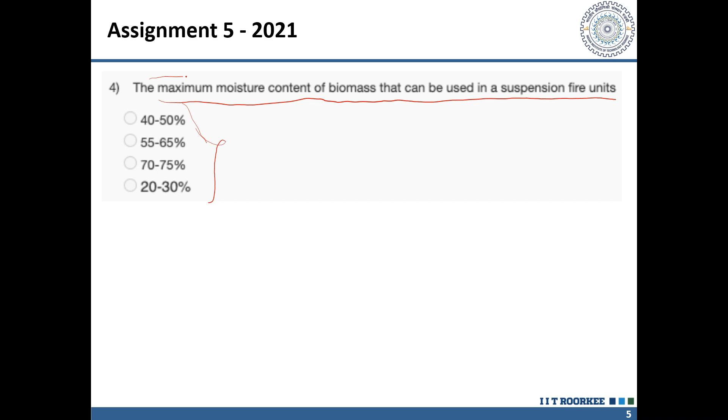So the question is, what is the maximum moisture content of biomass that can be used in suspension fire units? When we fire the biomass in a suspension fire unit, there is a particular amount of moisture required; there is a limit beyond which we cannot go. So what do you think might be the maximum moisture content that we can use in biomass? Any guesses? Anyone want to make a guess? No one?

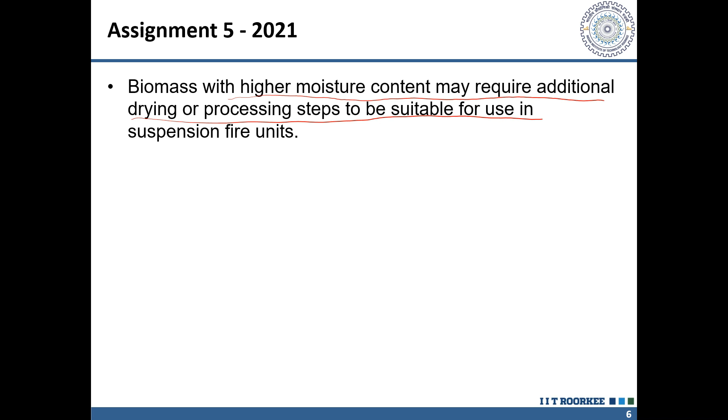Okay, the correct answer is 55 to 65%. The maximum moisture content we can use in biomass is 55 to 65%, but we generally use up to 50% moisture only, which results in a very optimum manner, and the maximum we can go is 55 to 65. Biomass with higher moisture content may require additional drying or processing to be suitable for suspension units. For example, if biomass has moisture content higher than 65%, like 70 to 80%, we will need some drying so that the moisture content decreases below 65, or between 55 to 65, or more preferably near 50%, so that further processing can be optimized.

The problem with high moisture is that the combustion process becomes inefficient, leading to incomplete combustion. If moisture content in the biomass is high, combustion is not very good, leading to lower heat output and increased emissions. Additionally, high moisture content can lead to slagging and fouling issues in the combustion chamber, which is made of metal or alloys that can suffer fouling due to high steam or water content, since water can also lead to corrosion. This can reduce the age of the combustion chamber, reduce efficiency over further cycles, and increase maintenance cost.

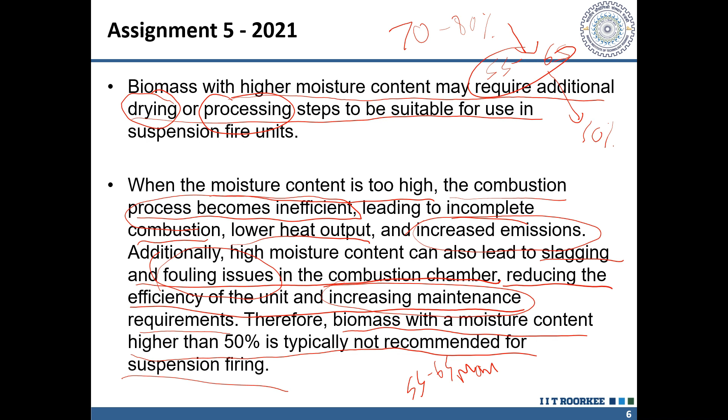So if moisture content is high, it leads to incomplete combustion, lower heat output, increased emissions, fouling of the combustion chamber, reduced efficiency, and increased maintenance cost. Therefore, biomass with moisture content higher than 50% is not typically recommended for suspension firing, but we can go up to 55 to 65% at max, though 50% is typically recommended for combustion units.

Now let's move to the next question: furfural resinification is defined as. You might remember furfurals as compounds formed during pre-treatment, specifically during the hydrolysis of hemicellulose. In week 4 we discussed that when we hydrolyze hemicellulose, we get soluble sugars, but we sometimes also get unwanted compounds such as furfurals. So the question is about furfurals.

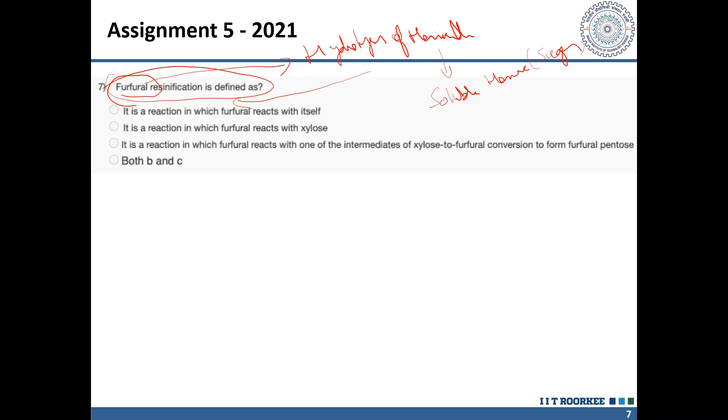Furfural resinification is defined as: it is a reaction in which furfural reacts with itself; it is a reaction in which furfural reacts with xylose; or it is a reaction in which furfural reacts with one of the intermediates of xylose to furfural. So what do you think might be furfural resinification? Any guess?

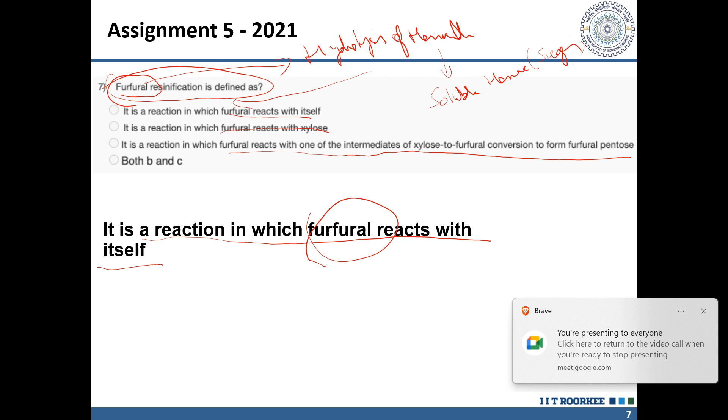Okay, so it is a reaction in which furfural reacts with itself. Furfurals are some kind of unwanted compounds formed during the hydrolysis of hemicellulose, and these furfurals react with itself to form something which is a type of resin. I will explain this resin and furfurals in the next slide.

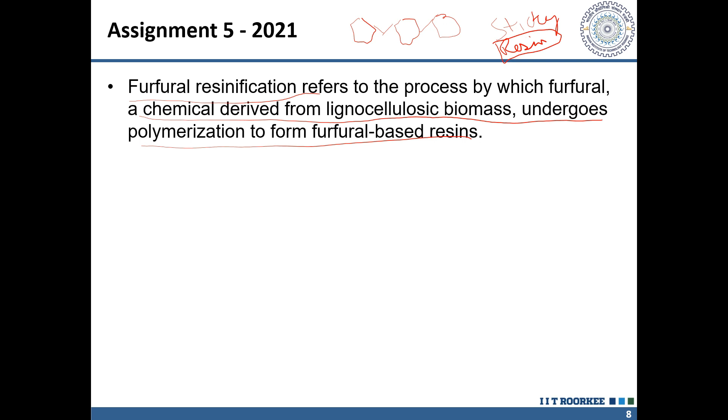Resinification process is the process by which furfural, a chemical derived from lignocellulosic biomass, undergoes polymerization to form furfural-based resin. It is a type of cyclic compound, and it reacts with itself, and it forms a very dense and sticky substance. This sticky substance is known as resin. You might have heard this term used for adhesive in other applications. Furfurals react with itself by heat, temperature and time, and it forms resin. This formation of resin is known as resinification, and when furfurals form resin, it is known as furfural resinification.

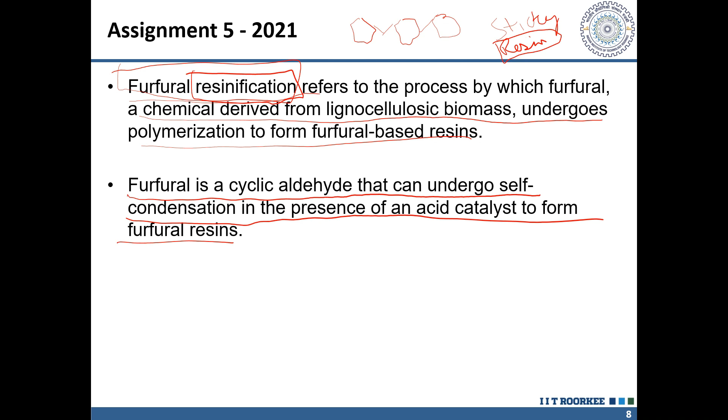Now we understand that furfural is a cyclic aldehyde that can undergo self condensation in the presence of an acid catalyst to form furfural resins. These resins have a wide variety of applications, including use as adhesive, coating, and thermosetting materials. So whenever we get furfurals during the hydrolysis of hemicellulose, we can extract the furfurals and do the polymerization to form the resin, and use it for a wide variety of applications such as adhesives, coatings, and thermosetting materials.

The properties of the furfural resin can be controlled by adjusting reaction conditions such as amount of catalyst, temperature, and time. The higher the temperature and the higher the time we give it, the harder the resin will get. So this particular furfural reacts with itself and forms a type of resin - you see it has now connected by itself, which is why it is also known as polymerization of furfurals to form a resin, which is particularly sticky in nature and can be used in adhesives and other coating applications.

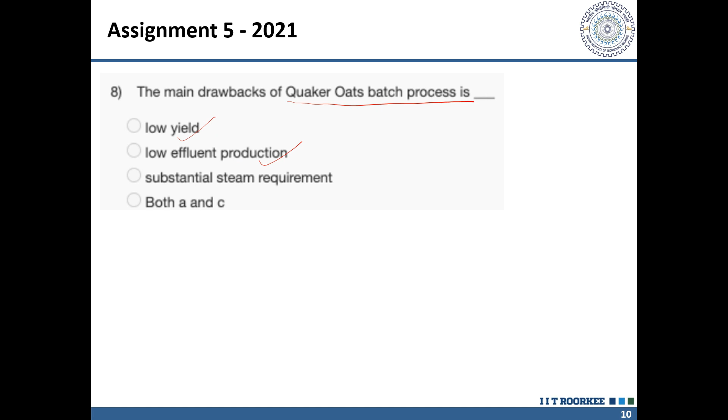So first we will go to the main question. The question was the drawbacks of Quaker Oat process: is it low yield, low effluent production, or substantial steam requirement? The answer is very low yield and substantial steam requirement. Low effluent production is not a disadvantage - it is an advantage, that's why it's not the right answer. The right answer is low yield and substantial steam requirement.

But what is this process? Quaker process is a pre-treatment to convert biomass into some valuable products. In this, biomass is treated with an acid such as aqueous sulfuric acid or phosphoric acid, along with steam, at nearly 153 degrees Celsius. This is also known as the hydrolysis step, and this hydrolysis step converts pentosans in biomass into pentoses.

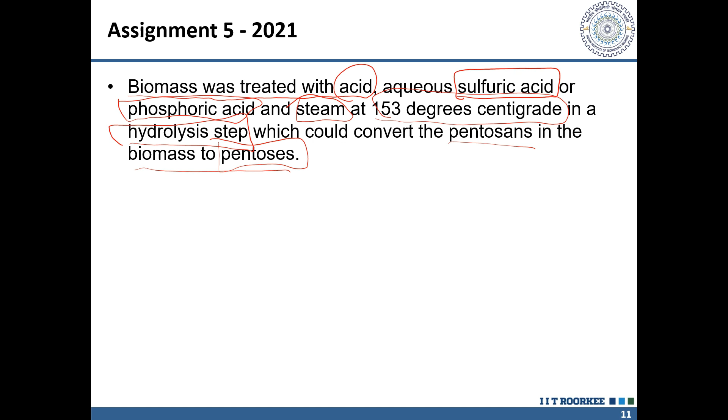The whole process of any treatment, such as acid hydrolysis, alkali pretreatment, organosolv pulping, enzymatic hydrolysis, or this Quaker process, has to do only one thing: convert biomass, which is made up of cellulose or hemicellulose, into its monomers or dimers. So the main thing is to convert polymer into monomers - just that, so that we can use this for fermentation and then produce biofuels. Quaker Oats process is also a similar process, and in this we use acid in the presence of steam, so that we can get pentoses from the biomass.

So these pentoses can be converted into furfural, and in a subsequent stage furfural can be recovered by steam stripping from solution. But the main problem with this process is it has a very low yield of less than 50%, and it also requires very much steam for the reaction. Producing steam is a very costly process in industry, and it also has a very high effluent production, because we use acids in it.

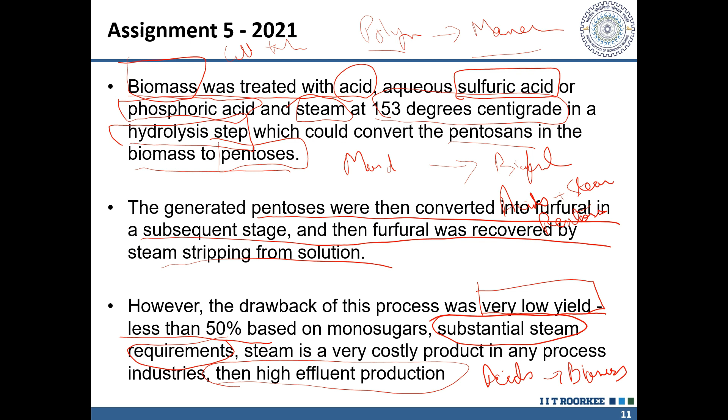So its major disadvantage is the substantial requirement of steam and very low yield, because the acids present can sometimes degrade the biomass also. When it degrades the biomass, we get very low yield.

Now let's move on to assignment 5 of 2022. Most of assignment 5 of 2021 was repeated in 2023, so those questions I will be discussing at the last.

The process by which wood absorbs moisture from humid air is known as? Wood has hydroxyl bonds. It is hygroscopic in nature, and it attracts moisture from the environment very rapidly. But what is the process in which wood attracts water? Is it adsorption, absorption, humidification, or both? Any guess what phenomenon wood uses to absorb water?

Okay, so the answer is both A and B. Wood is very hygroscopic in nature, and that's why moisture from the air can come onto the surface of the wood. After the water comes on the surface, it goes inside and gets absorbed. The water coming in physical contact with wood is adsorption, and when it goes inside the wood, it is absorption. So in both ways, wood takes up water from humid air.

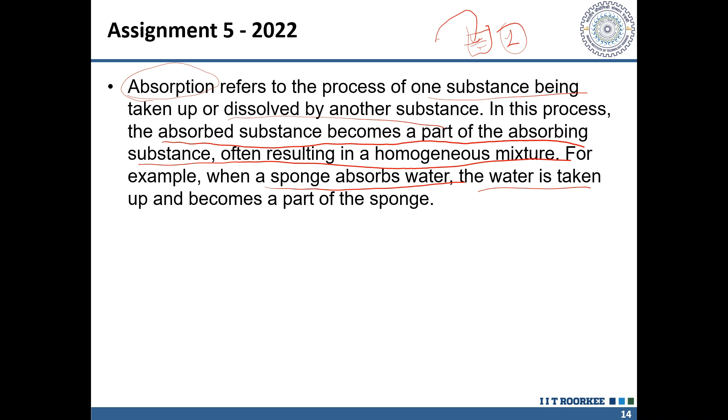First, we will see the word absorption. It refers to the process of one substance being taken up or dissolved by another substance. If a substance takes another inside it and forms a one-component type thing, it is absorption. The absorbed substance becomes part of the absorbing substance, often resulting in a homogeneous mixture. For example, a sponge absorbs water; the water is taken up and becomes part of the sponge.

On the other hand, adsorption is a process of a substance sticking to the surface. Molecules stick to the surface of other substances without necessarily being taken into the substance itself. For example, charcoal is used to filter impurities from water. The impurities are adsorbed onto the surface of charcoal; they will not go inside but onto the surface. So this is adsorption.

If we look at this example, if we have a surface here, in adsorption the water molecules will come to the surface. They will not go inside. But in absorption, the water molecules will penetrate the surface and go inside the structure. That is absorption.

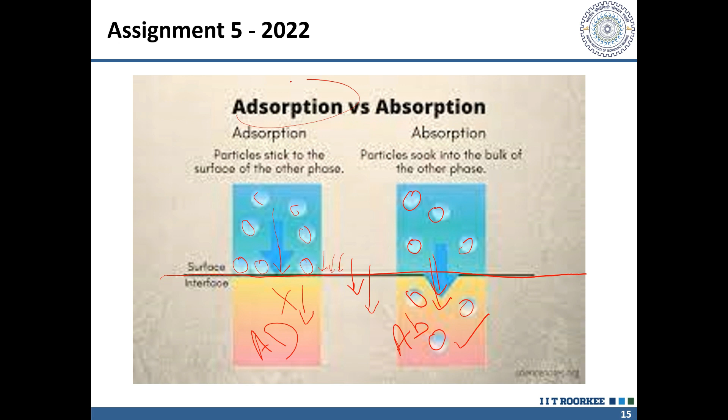So when humid air is present in the environment, the wood will first adsorb the molecules from the air, and water molecules that come to the surface will go inside the wood. So in this case, wood uses both adsorption and absorption.

The second question: the relation between flame temperature and moisture content of woody biomass is directly proportional, inversely proportional, or independent of each other. If woody biomass has high moisture in it, what will be the requirement of flame temperature? If high moisture requires higher flame temperature, the answer is directly proportional. If higher moisture means lower flame, it is inversely proportional. Or there is no relation between them.

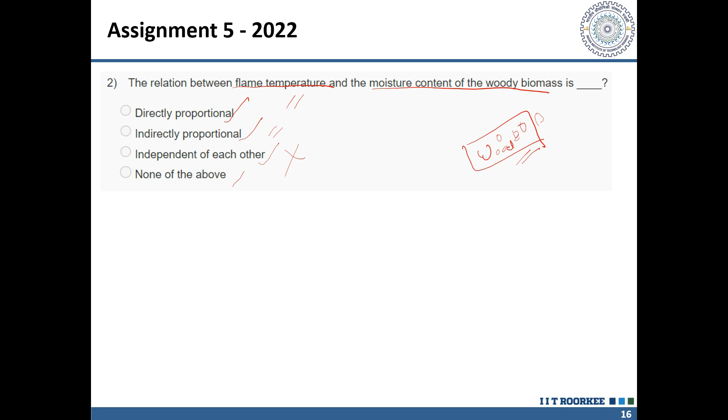The answer is that it is directly proportional. How? Flame temperature is directly related to the amount of heat necessary to evaporate the moisture content in the wood. The higher the moisture, the higher the heat required to evaporate it, and therefore the higher the flame temperature. Similarly, if the moisture is lower, less energy is needed to remove the water and boiler efficiency is higher.

So to increase boiler efficiency, we need wood with low moisture content. We have also seen in the first question of this slide that a moisture content of 50 to 55 to 65% is preferred, and not above that, because it will result in lower boiler efficiency. As the moisture content of woody biomass increases, the energy required to vaporize the moisture also increases. That's why the answer is directly proportional.

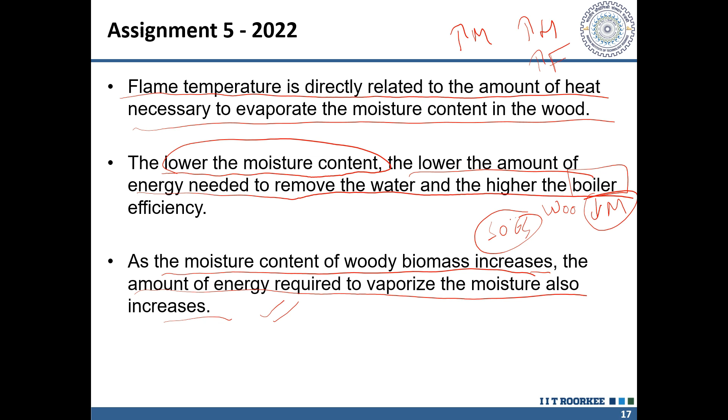So now let's move on to the next question. In the commercial steam explosion of biomass, the typical pressure of the steam is... So there's a process in which biomass is exploded only by steam, without any chemicals. That process is known as steam explosion. We do not use any kind of acids, alkali or organosolv. We only use steam. So what kind of pressure does it use? 7 to 10 MPa, less than 7, 10 to 15, or more than 15 MPa.

Anyone wants to make any guess about this? Anyone? You might know the answer also, and don't think about whether the answer might be wrong or right. You can make a guess also.

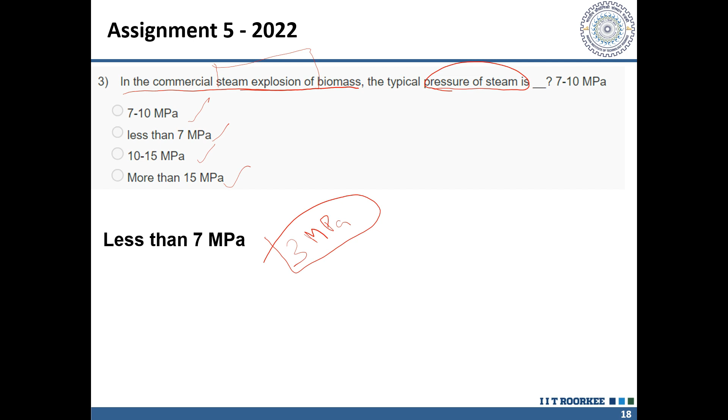No one? Okay. So the answer for this is less than 7 MPa. Particularly, we require around 3 megapascal of pressure in case of steam explosion. So the answer is less than 7 MPa. So we use 1 to 3.5 megapascal of pressure for the steam explosion, and this amount of pressure is sufficient to cause the biomass to undergo rapid and intense pressure release.

If the steam goes inside the biomass with very high pressure, it will burst this biomass and disrupt the cell structure. So the cell will be disrupted, and the fibers inside it will also get disrupted due to this high pressure. So 3.5 megapascal pressure is sufficient to disrupt the whole structure of biomass, and this will lead to fibrillation of biomass. So every individual fiber will get opened. It will form a very open structure.

This open structure will lead to an increase in the accessibility of cellulose to enzymes or chemicals for further processing. So before we do any kind of acid hydrolysis or organosolv process, we can also do steam explosion, because steam explosion can reduce the amount of chemicals required in the next step, since we have already opened up the fibers, and thus less acid is required to go inside them. So steam explosion is sometimes done prior to any kind of acid treatment or alkali treatment.

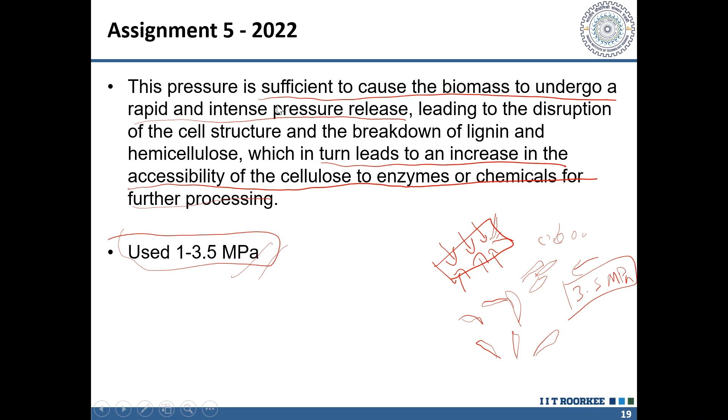A hydropulper is a machine into which we can feed recycled materials, such as recycled cardboard and newspapers. We can put this waste biomass into the hydropulper, and there is a mechanical mechanism which rotates in it, and these blades cut the fibers and fibrillate the newspaper into fibers. Plus there is water in it. So the hydropulper works on two mechanisms: first, the cutting action by the blades, and second, the force created by the water.

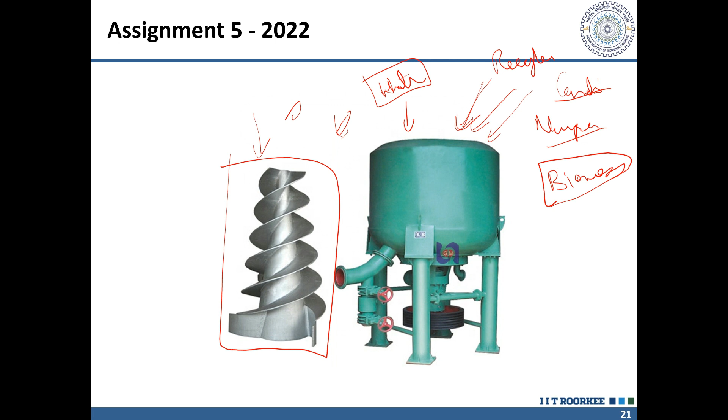So the water and mechanical forces combine very synergistically to make fibers out of the cardboard, newspaper or any other waste biomass. In this way, we can use waste biomass to create fibers, and then we can treat those fibers and produce some kind of products by fermenting them.

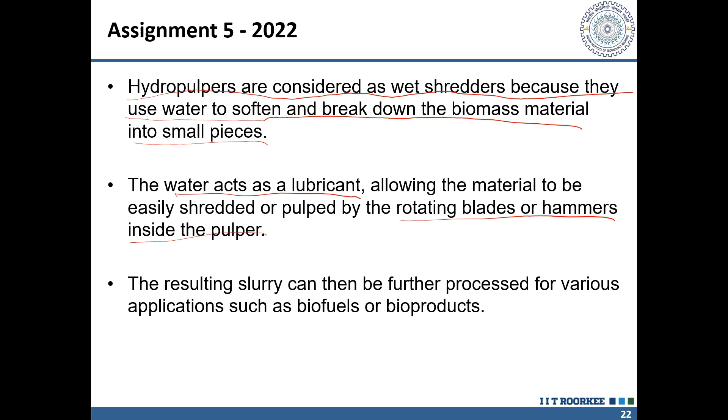So hydropulpers are considered wet shredders because they use water to soften and break the biomass material into small pieces. Water acts as a lubricant, allowing the material to be shredded or pulped by the rotating blades or hammers inside the pulper. The resulting slurry can be further processed for various applications such as biofuels or bioproducts. So I hope that you have understood what a hydropulper is, its mechanism, and why water is used in it. That's why it's also known as a wet process.

So the next question is, which type of feedstock can be used for supercritical water gasification? Is it dry feedstock, wet feedstock, both A and B, or none of the above? So the answer for this is wet feedstock, and you can easily guess it because of the name, supercritical water gasification. So it has the word water in it.

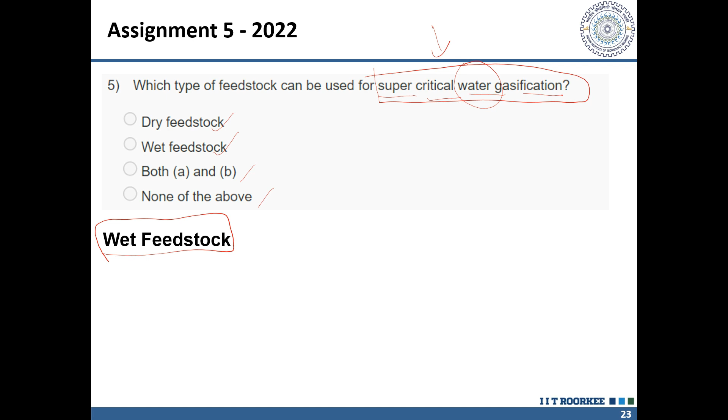So it only uses wet feedstock to continue the process. But what is the supercritical water gasification process? In this process we take biomasses, any type of biomass, either it is wood or vegetation or any type of husk or grasses. We can take any type of biomass and give it some conditions.

Those conditions are known as supercritical conditions, and that is temperature above 374 degrees Celsius. We have to give a temperature of 374 degrees Celsius and a pressure of 22.1 megapascal. So these are the supercritical temperature and pressure of water to generate a state in which water exists neither in liquid nor vaporized phase. So this is known as the supercritical water gasification process.

In this process, these lignocellulosic biomasses convert into some useful gases such as hydrogen, carbon monoxide, carbon dioxide, and methane. And this we can use as fuel for further uses. The main advantage of this process is that we can use any type of lignocellulosic biomass, any type of waste biomass, and just by giving high pressure and high temperature, we can convert it into useful gases.

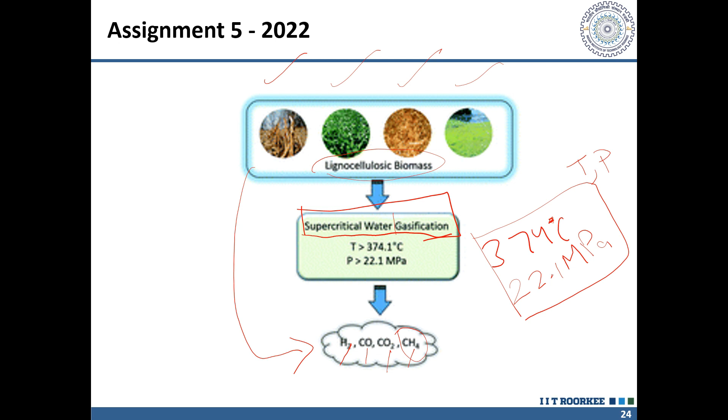So generally, this process can take both dry and wet feedstock. Supercritical water gasification can take both types of feedstock, but wet feedstocks are preferred as they are easy to handle and of higher energy density than dry feedstocks. So, supercritical water gasification is a process that uses water at very high temperature and pressure, also called supercritical condition, to convert biomass into gaseous fuels.

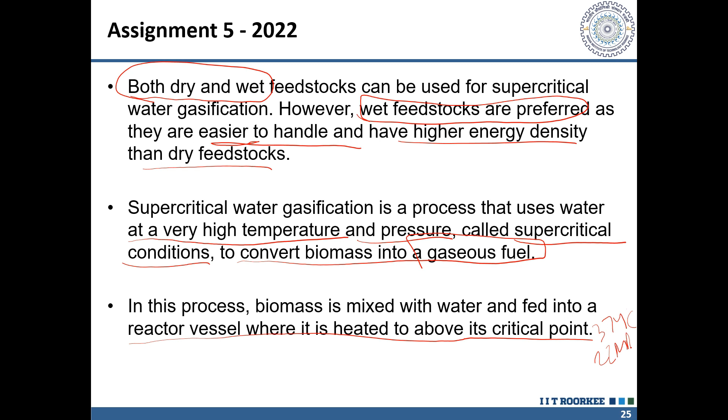In this process, biomass is mixed with water and fed into a reactor vessel where it is heated above its critical point, that is 374 degrees Celsius and 22 megapascal of pressure, more than 22 and more than 374 degrees Celsius. So if we give it a very high temperature and high pressure, we can convert any kind of lignocellulosic biomass into useful gases.

So what is this supercritical condition? Supercritical condition is a state in which water exists in a state that is neither liquid nor gas, but instead it has properties of both. So at this high pressure and temperature, it is neither in liquid state nor in gas state, but it will show the properties of both, and that's why it is called supercritical condition.

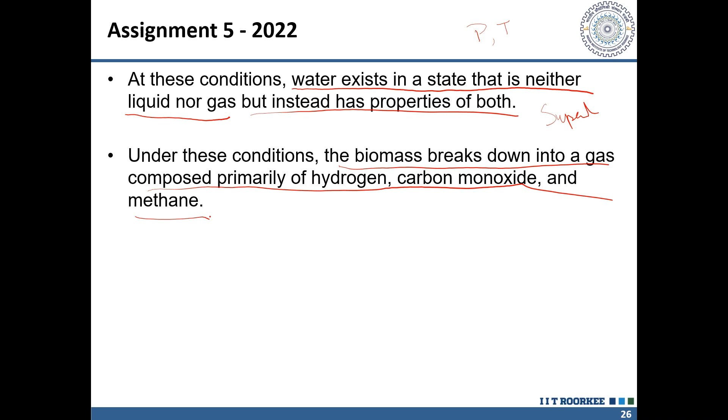Under these conditions, the biomass breaks down into gas composed primarily of hydrogen, carbon monoxide, and methane, and the resulting gas can be used as a fuel for power generation or as a feedstock for production of other chemicals. So in this way, we can utilize the waste biomasses to produce some products which have a very high economic value.

Supercritical water gasification has several advantages over other biomass to fuel processes, such as it can handle a wide range of feedstock. As we have already discussed, it can handle any type of feedstock such as woody biomass, non-woody biomass, any type of straw, grasses, anything. We can use a very wide range of feedstocks.

Also, it has a very high conversion rate and very low emissions. And all the gases which we get, hydrogen, carbon monoxide, and methane, can be used either for fuel, or we can use these gases to produce some other chemicals also. So it has very many advantages over other processes.

So now let's move on to the sixth question. What are the different products produced from ultra rapid pyrolysis? The options are bio oil, chemicals and gas, charcoal, and chemicals and gases. So first of all, what is pyrolysis? Pyrolysis is nothing but a process in which we heat some biomasses in absence of oxygen or in absence of air and at high pressure and high temperature. Then it is known as pyrolysis.

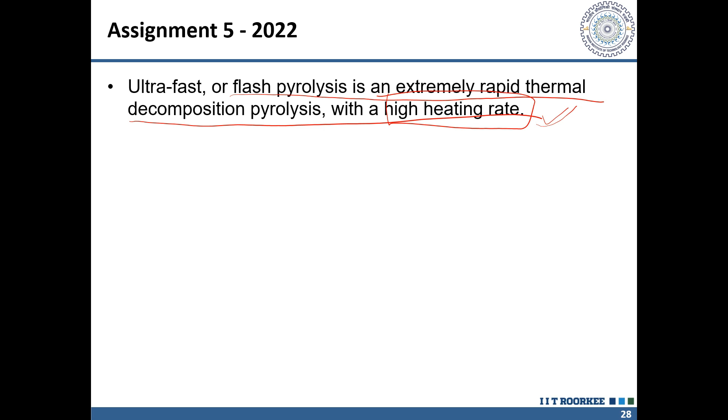So the main thing which we are getting by increasing the heating rate is increased content of bio oils. We get very high amount of bio oils and very less amount of char. So we have reduced the amount of char and increased the amount of bio oils just by increasing the heating rate. So that's why it is known as ultra fast pyrolysis. It is also a very fast process.

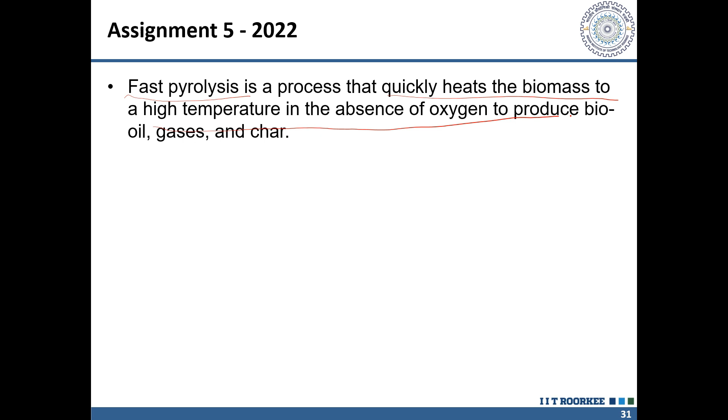So okay, what is fast pyrolysis? It is a process that quickly heats the biomass to high temperature in absence of oxygen to produce bio oil, gases, and char. The yield of bio oil depends on various factors such as type of biomass, temperature, and residence time of the pyrolysis process. And typically, the yield is between 60 to 75% of bio oil.

This is because fast pyrolysis is designed to maximize the yield of bio oil as a primary product. However, the yield can depend on various conditions such as the time and temperature, because there is a very broad range in temperature also. So that's why the yield has a very broad range, that is 60 to 75%.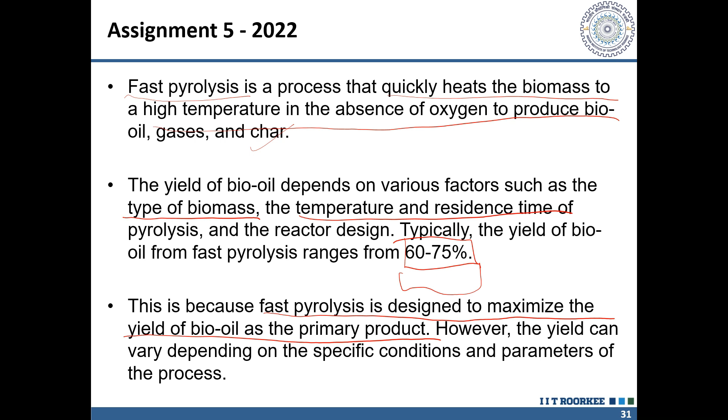Now let's move on to the eighth question. Which of the following pyrolysis reactors can process biomass having large particle size? So till now we have seen what pyrolysis is: a process in which we heat the biomass in the absence of oxygen. But what kind of reactor will we require if we have a larger particle size? So the answer to this is vacuum pyrolysis reactor.

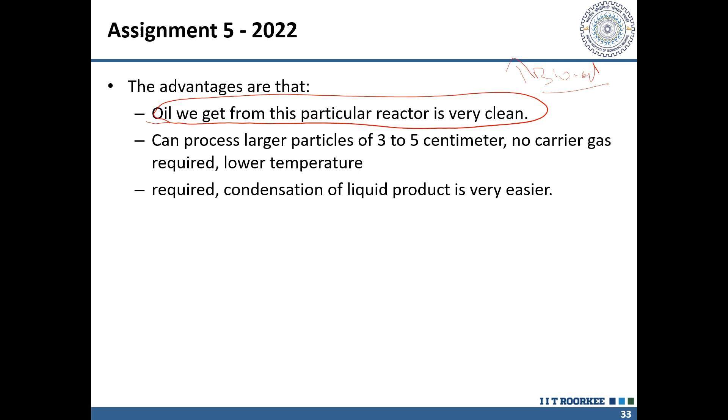So the advantage of vacuum pyrolysis reactor is that, first of all, if there is a vacuum, if we create a vacuum inside the pyrolysis chamber, then we will get a very clean bio oil without any contamination. So the quality of bio oil is superior in vacuum pyrolysis, and there is also one more advantage that we can use some larger particle size, such as 3 to 5 centimeter.

We can also go for 3 to 5 centimeter of particles in the pyrolysis process, and no carrier gas is required, and also lower temperature. We can also conduct the pyrolysis at lower temperature, just because by applying a vacuum in it, we can go for lower temperatures also.

But it has some disadvantages, such as it is a slow process. The residence time is also high. Residence time means the contact of heat with the biomass. So that time is also high. That's why it is a slow process.

In vacuum pyrolysis we are applying a vacuum, and we can also give particle size of 3 to 5 centimeter. So one more disadvantage is that we require a very large scale equipment for this. We cannot do it in a small equipment. We need a large scale equipment.

And as the equipment is very large, the heat and mass transfer rates are poor, because the temperature and mass transfer rate can be different at different positions due to the large size of the container. Therefore, it also has a disadvantage of poor heat and mass transfer rate. Also, it generates water when compared to other processes. So apart from the advantage of using 3 to 5 centimeter larger particles, it also has some disadvantages.

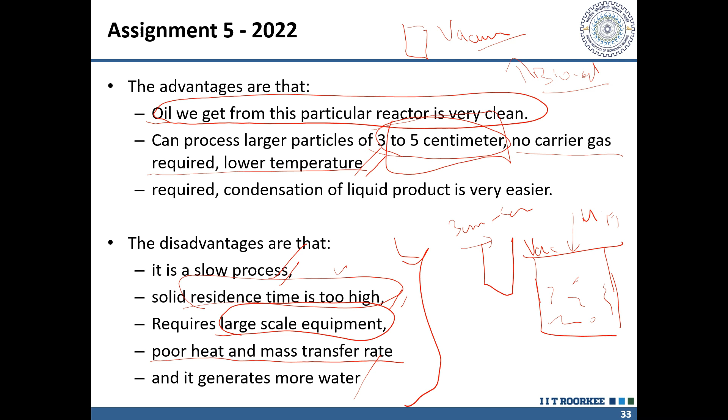So now let's move on to the ninth question. The homogeneity of pre-consumer food waste is blank compared to the post-consumer food waste. So first of all, what is pre-consumer food waste and post-consumer food waste? Pre-consumer food waste is nothing but a waste which we have not used. We as consumers have not used it, and it becomes waste before consuming.

And post-consumer mixed waste means we have consumed it, and somehow when we dump it into the yard, we mix it with very different things such as packaging also. So pre-consumer food waste will be of homogeneous type, and post-consumer will be heterogeneous, because we mix things after consuming it. So the question was, the homogeneity of pre-consumer food waste is. So homogeneity is higher for pre-consumer food waste.

So if we go for a small example, pre-consumer food waste typically comes from a single source, such as a restaurant or food processing facility, and it is often sorted and separated before disposal. So this is a type of food waste, pre-consumer food waste, and it has high homogeneity because it also goes through a sorting procedure.

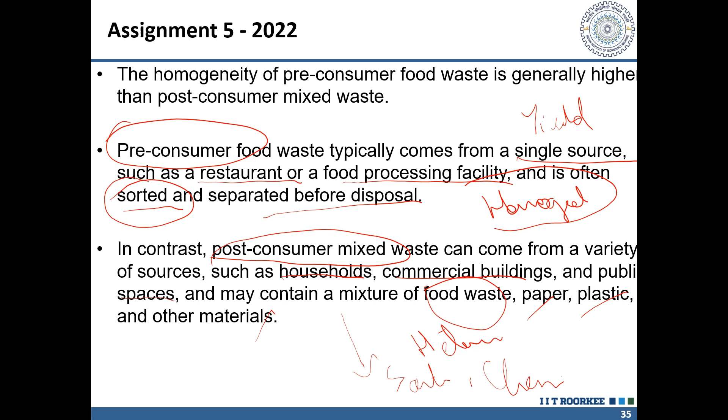Therefore, the homogeneity of pre-consumer food waste will be higher than post-consumer food waste, and that's why if we want to create some fuel or other useful products out of the food waste, we will prefer pre-consumer food waste because it is homogeneous and therefore the yield will be high for these products. But if we are using post-consumer food waste, we may need some kind of sorting or cleaning before going towards the chemical reactions or further processing.

The main product obtained from the fermentation process is. So by now we have seen that whatever we are doing, we are just breaking the polymers such as cellulose and hemicellulose into smaller sugars, which are monomers. So why are we breaking it? So that we can do fermentation of the sugars. So what will this fermentation lead to? We can obtain bioethanol and carbon dioxide.

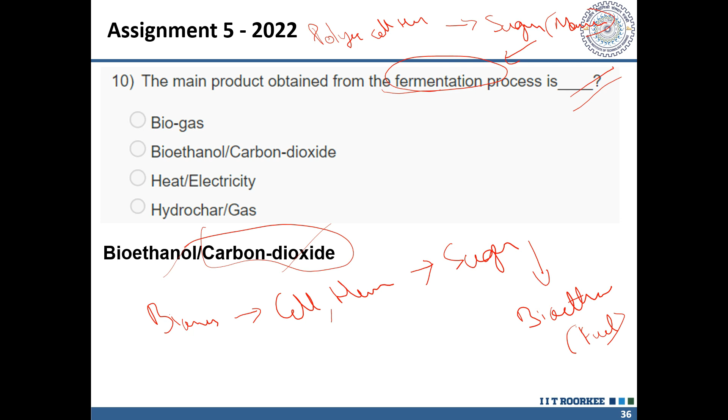So the main process for this is that we take any type of biomass and take the cellulose or hemicellulose of it and then convert it into sugars, on which we will do the fermentation and obtain bioethanol. And this bioethanol will act as a fuel. So the main product of fermentation is bioethanol, and the secondary product is carbon dioxide. It also produces many other products in very minor quantity.

So one of the most common products obtained from fermentation is bioethanol, which is produced by anaerobic fermentation of sugars present in the biomass. Other fermentation products may include biogases such as methane, carbon dioxide, and it may produce some organic acids, hydrogen gas, and various gases depending upon the feedstock and processing conditions.

But the major thing is why we are doing all this, why we are taking the biomass and treating it with acid, alkali, organosolv. We are just breaking those complex polymers into smaller sugars or monomers so that we can ferment those products and produce bioethanol. So the main objective of all the pre-processing or other treatments was to produce bioethanol out of the biomass.

You all might have done assignment 5 of 2023, and the deadline was 2 days ago. You may also have received the answers for those. Now I will discuss those questions, answers, and the reasoning behind them so that your concepts become very clear.

The first question of this year's assignment 5 was: the common type of dry shredder used for reducing the size of biomass is - hydropulper, horizontal shaft hammer mill, vertical shaft hammer mill, or both B and C?

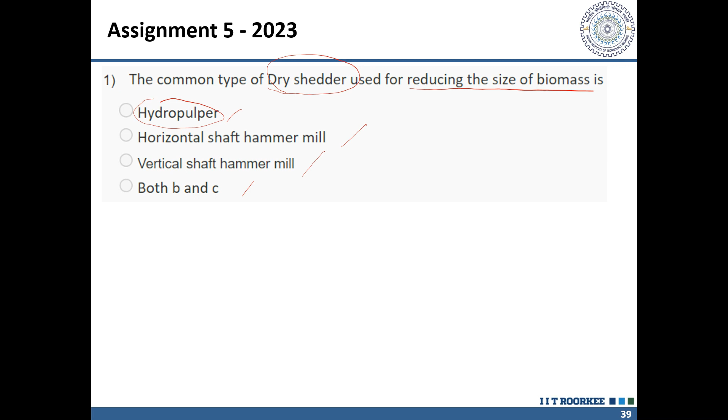From the previous questions we have seen that hydropulper is a wet process, and also we can guess from the name hydro that it is not a dry shredder. So the answer is both B and C: horizontal shaft hammer mill and vertical shaft hammer mill.

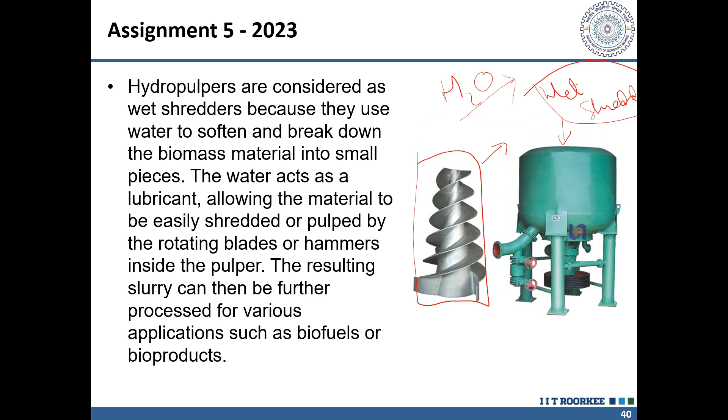You have all seen the mechanism of hydropulpers, that it has a cutting action by the blades, and it also uses the centrifugal forces of water inside it. With the help of water and mechanical forces, we can disintegrate the fibers in the hydropulper. So it is a wet shredder, we reduce the size by a wet process. Hydropulper is a wet shredder, it is not a dry shredder.

But hammer mills are known as dry shredders. These are of two types: one is vertical and second is horizontal.

Before going towards the vertical and horizontal types, what are hammer mills? They are mostly impact grinders with swinging or stationary steel parts forcing ingredients against a circular screen or solid serrated section designated as a striking plate. It is a type of grinder in which steel bars swing and then reduce the size of biomass with force.

In this, the material is held in a grinding chamber. We put the material in, and the hammer mills are used until the size has been reduced. This is a type of mechanical process - there is no water in it. It is a purely dry process.

But this high mechanical activity leads to an increase in temperature, and therefore heat is imparted to the material due to the work of grinding, related to the time it is held within the chamber. You might have seen ball milling also, where a ball hits the surface on both sides at very high frequency, and with time it generates heat. So heat is also generated in this process.

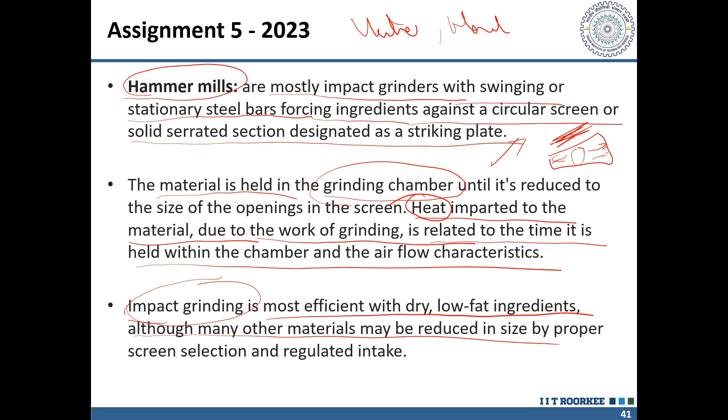So it is a type of impact grinding - we are impacting the biomass with a hammer. It is the most efficient with dry and low fat ingredients, although many other materials may be reduced in size by proper screen selection and regulated intake.

So what is this? There are two types of hammer mills: first is the horizontal type, and second is the vertical type.

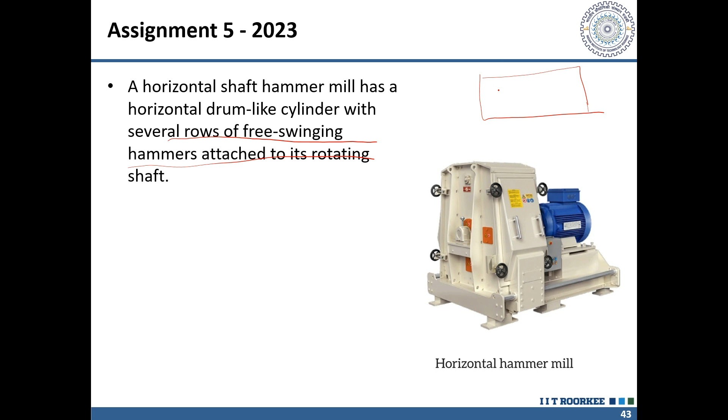In a horizontal shaft hammer mill, it has a horizontal drum-like cylinder with several rows of free swinging hammers, attached to a shaft. The shaft rotates, and the hammers then impact the biomass inside it.

Biomass material is fed to the mill from the top and is pulverized - in layman's terms, this just means reduction of size. The biomass is pulverized by the repeated impact of the hammers against the material. The ground material is then discharged from the bottom of the mill, and we get the ground or reduced-size particles from there.

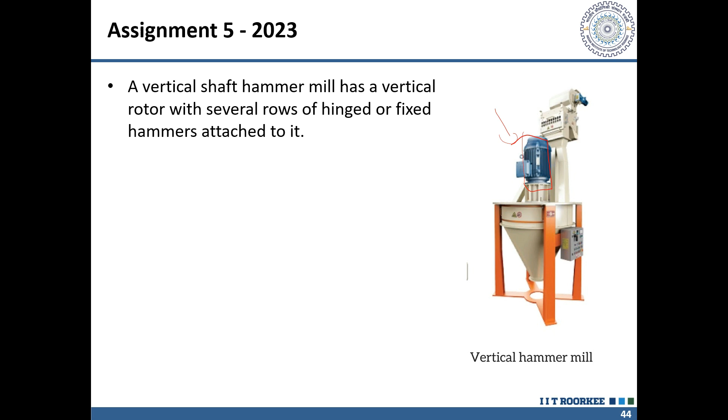In the case of a vertical hammer mill, it has a vertical rotor, with several rows of hinged or fixed hammers attached to it. Here too, the biomass is fed from the top into the mill, then pulverized by the impact of the hammers against the material, and the ground material is collected from the bottom.

So the mechanism of both is the same, the only difference being that one is a vertical process and the other is horizontal. But the main thing is that hammer mill is a type of impact grinding, not wet grinding - there is no involvement of water in it.

So the second question of this year was: the density and moisture content of baled straw is in the range of. So first, what is baled straw? What is bale? Bale is nothing but a compressed form of biomass.

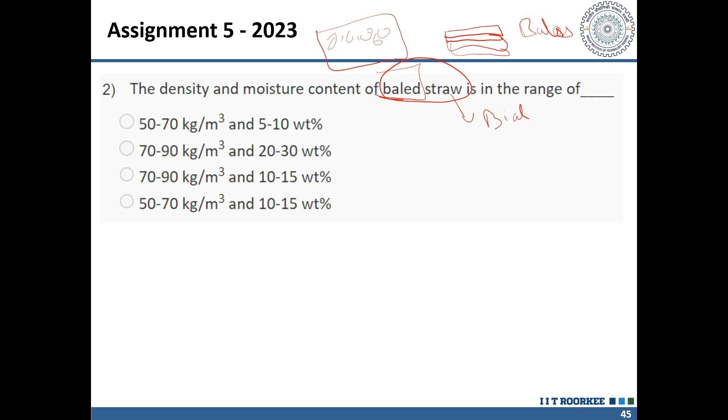We have biomass or cellulose, and whenever we see cellulose and biomass, they are very fluffy and take up much higher space. So we compress it into blocks of biomass, and this highly compressed form is known as bale, B-A-L-E, or bales. So if we are using straw as the biomass, then this is known as baled straw. So the density and moisture content of baled straw is in the range of...

The correct answer for this is 70 to 90 kg per meter cube, and 10 to 15 weight percent.

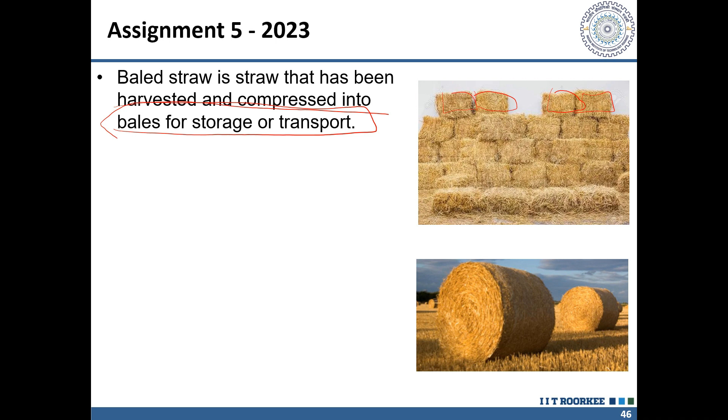So this is what baled straw looks like. It is a straw material that we have compressed so that it takes less space. Baled straw is a straw that has been harvested and compressed into bales for storage and transport, so that transportation and storage are optimum and easier.

And what is straw? Straw, in agriculture, is an agriculture byproduct consisting of dry stalks of cereal plants such as wheat, rice, and barley.

You might have heard that there is pollution near Delhi NCR due to stubble burning of straws. Those straws are also biomasses, and those biomasses can also be used to convert into fuels and other bioproducts. So those are the straws we see in news about stubble burning in Delhi NCR causing pollution there.

So now you have understood what straw is. Straw is an agriculture byproduct that can be made up of wheat, rice, barley, or oats, hence the names wheat straw, rice straw, barley straw, and oat straw. Baled straw is commonly used for animal feed, bedding, and mulch, and it can also be used as a feedstock for bioenergy production.

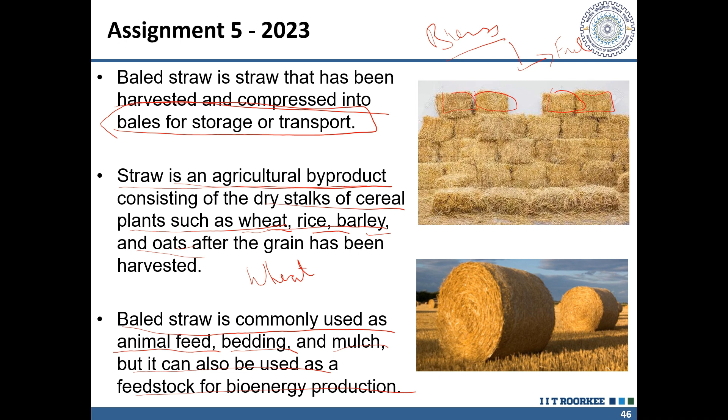So now let's move on to the third question: the increase in moisture content of biomass - how does the moisture content in biomass affect the boiler efficiency?

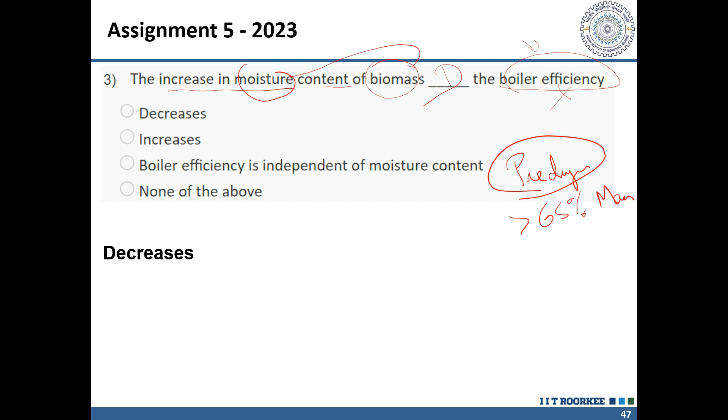The increase in moisture content of biomass decreases the boiler efficiency, because the energy required to evaporate the excess moisture present in the fuel reduces the available energy of combustion, leading to a decrease in boiler efficiency. Also, the higher the moisture content, the greater the fouling of the boiler, hence the boiler efficiency gets reduced.

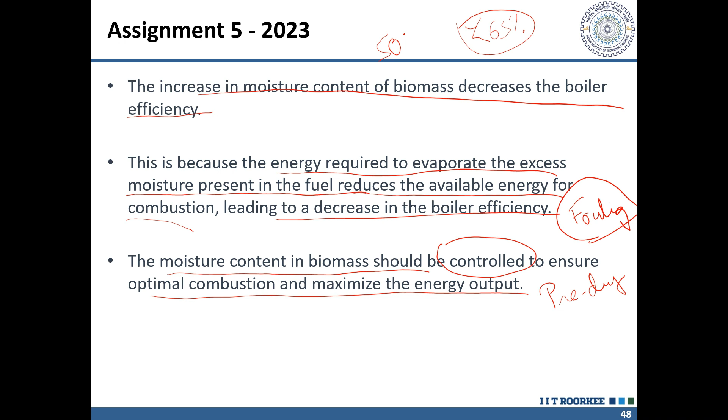The moisture content in the biomass should be controlled to obtain optimal combustion and maximize energy output. How can we control the moisture? By doing pre-drying or other treatments to reduce the moisture to attain a level less than 65%. The optimal conditions for combustion are achieved when the moisture content is near 50%.

So now let's move to the fourth question: the temperature maintained in the pyrolysis zone of a gasifier is. Now you have seen what pyrolysis is - it is a technique in which we burn a substance, in our case biomass, in the absence of oxygen, and we can also apply vacuum to it.

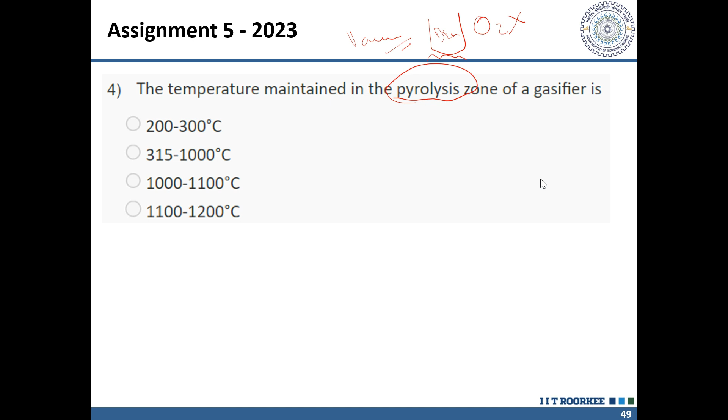What type of temperature do we require? As you have seen, there are three types of pyrolysis: low/conventional, fast, and ultra fast. The answer for this is 315 to 1000 degrees Celsius, because different temperatures are required for different pyrolysis techniques. Conventional pyrolysis may require lower temperature, fast pyrolysis needs mid temperature, and ultra fast pyrolysis may need higher temperatures with particular heating rates.

So what happens in this process is that the dried feed enters the pyrolytic zone, in which temperature ranges from 315 to 1000 degrees centigrade.

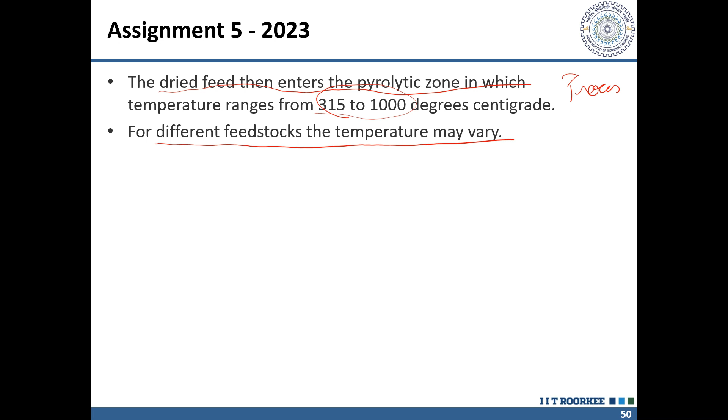Different feedstock may require different temperatures. We may require the temperature according to the process also, and sometimes the temperature varies with feedstocks. So different feedstocks may require different temperatures.

The pyrolysis process typically involves heating the biomass between 300 to 800 degrees in the absence of oxygen to produce biochar, syngas, and bio-oil. The temperature range of 315 to 1000 in the pyrolysis zone of a gasifier is suitable for the pyrolysis process.

The lower end of the temperature range, such as 315, is closer to the lower limit of pyrolysis temperature, and it could be used for low temperature pyrolysis processes such as conventional pyrolysis. The higher end of the temperature range, such as 800 to 1000, may be required for high temperature pyrolysis processes that need certain types of feedstock or applications, or for ultra fast pyrolysis.

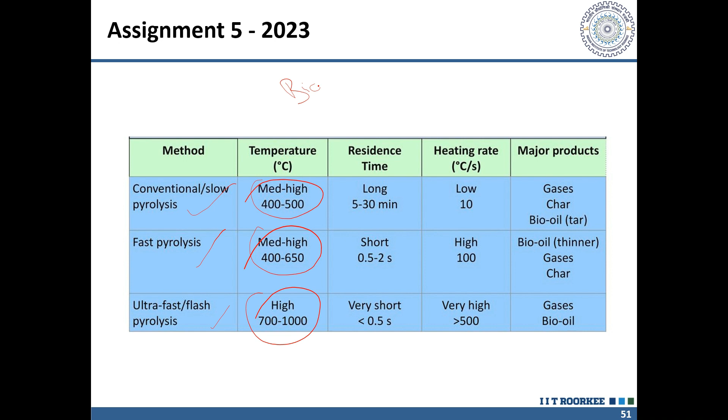As we have seen in this table earlier, conventional pyrolysis requires a medium temperature of about 400 to 500, fast pyrolysis requires a temperature of 400 to 650, and ultra fast requires 700 to 1000. Also, the temperature may vary depending on the type of biomass. That's why we use a very wide range of temperatures, such as 315 to 1000 degrees Celsius, for the pyrolysis method. So the correct answer was 315 to 1000 degrees Celsius.

In the updraft gasifier, the gasifying agent enters from the bottom, and fuels enter from the top. I will explain this in the next slide with a diagram. Fuel here means biomass.

It might seem complicated here. This is a type of updraft gasifier. We give our biomass from the top, and we give steam plus air from here, which is also known as gas, and it will be heated from the bottom. This gas will go from bottom to top, and interact with biomass in the opposite direction.

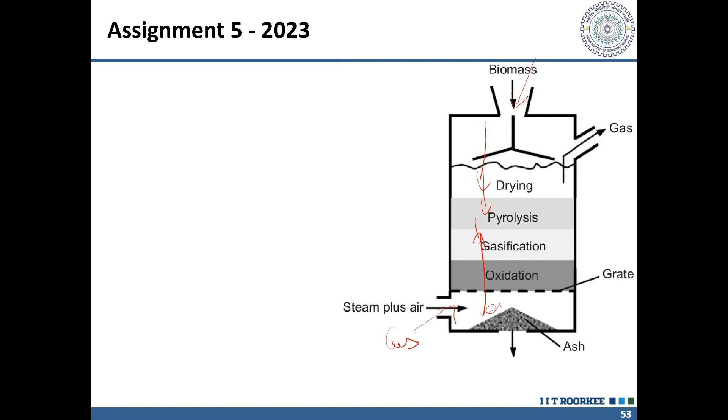This is done so that the gases which come into contact with the biomass are heated, so the heated gas comes in contact with biomass and results in high yield. So in an updraft gasifier, it is a process to convert biomass into a gas called producer gas or syngas. So what we are producing is a fuel known as syngas or producer gas.

In this gasifier, the gasifying agent such as air enters from the bottom and flows upward through the biomass fuel bed. The air will enter from the bottom, heat up, and go through the biomass fuel bed. As the air passes through the fuel bed, it reacts with the biomass.

Here, the reaction happens between biomass and air. In this section, there will be a reaction between the biomass and air, and it reacts with the biomass at very high temperatures, such as 800 to 1000 degrees Celsius. In this way, the biomass will be converted into gas or fuels.

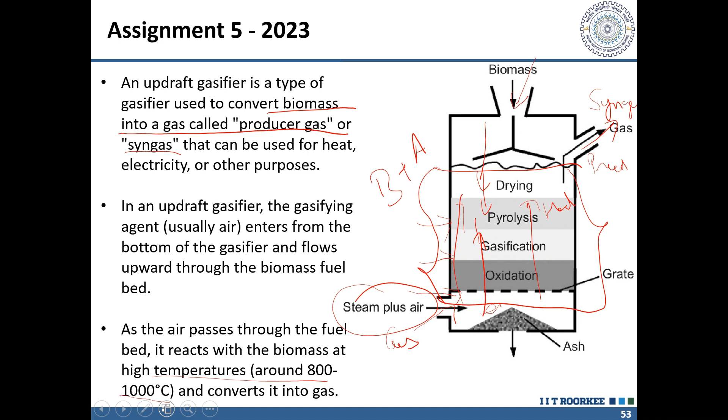There is a reason why in updraft gasifiers the air is entering from the bottom, and not from the top. The reason for the gasifying agent entering from the bottom is to ensure that the biomass is exposed to higher temperature as it is gasified. When the air goes from the bottom, it gets heated up and attains a high temperature, and when the gas interacts with the biomass, the biomass will be exposed to high temperature.

As the gasifying agent moves upward through the biomass bed, it becomes heated and helps to dry and preheat the biomass, removing any moisture, because moisture also reduces efficiency. So the heated gas will also remove the moisture from the biomass.

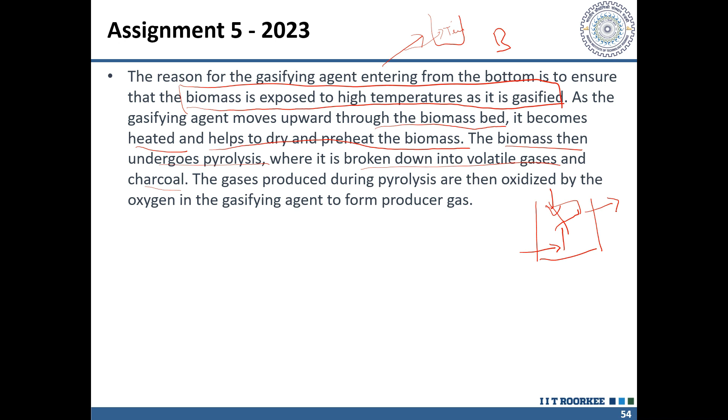After this, the biomass undergoes the pyrolysis process, where it is broken down into volatile gas and charcoal, which we get from the upward direction. That's why the gas enters from the bottom, goes up, and the biomass comes from the top. It dries the biomass, which is then converted into fuels after the pyrolysis process.

And that is the reason why biomass enters from the top. So biomass enters from the top of the gasifier and flows downward through the gasification zone. This allows the biomass to be preheated. It's the same process: biomass needs to be preheated and dried by the hot gas produced during the pyrolysis.

The downward flow of the fuel also helps to ensure that the biomass is exposed to higher temperature for a longer period of time. So if the biomass comes from the top and the gases come from the bottom, the contact time between the biomass and the higher-temperature gases will be more. So therefore, in an updraft gasifier, biomass is sent from the top, and the gases or air are sent from the bottom.

Now let's move on to the next question. The retention time of vacuum pyrolysis is. So we have seen what vacuum pyrolysis is. Vacuum pyrolysis is nothing but heating the biomass in the absence of pressure. We need to do it with vacuum and with the absence of air. And what were the advantages of vacuum pyrolysis? The main advantage was that it can use big biomasses also, which range from 3 centimeters to 5 centimeters. So if we have bigger particles, we can use vacuum pyrolysis.

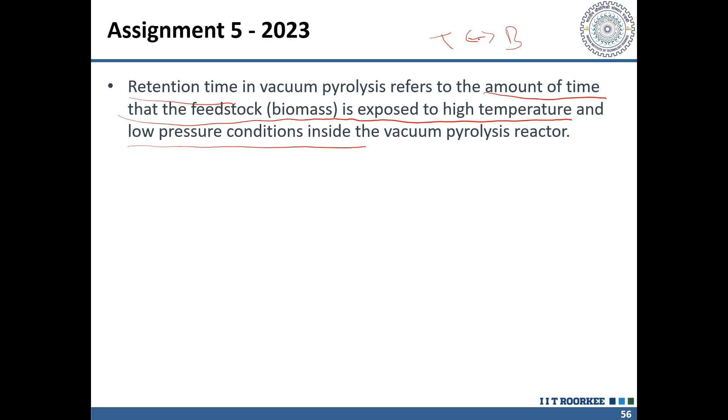But what is the retention time during this process? The retention time during this process is 2 to 30 seconds. So what is retention time? What do you mean by retention time? Retention time refers to the amount of time that the biomass is exposed to high temperature and low pressure inside. So the amount of time it is exposed to temperature is known as retention time. Retention time in vacuum pyrolysis can vary depending on several factors such as type and size of the feedstock, operating conditions, and desired end products.

So if the size of the feedstock is larger, we may need higher retention time. If the feedstock is smaller in size, then we can go for lower retention time. Therefore, there is a very broad range of retention time, 2 to 30 seconds. It is a very broad range because it depends upon the type and size of feedstock. Retention time also depends upon the temperature. If we are using conventional pyrolysis, we may need higher retention time. If we are using ultra fast pyrolysis, we may require lower retention time. So that's why the variation of the retention time is higher.

So the broad range of retention time, 2 to 30 seconds for vacuum pyrolysis, is because different types of feedstock may require different retention times to achieve the desired product yield, and it also depends upon the processing.

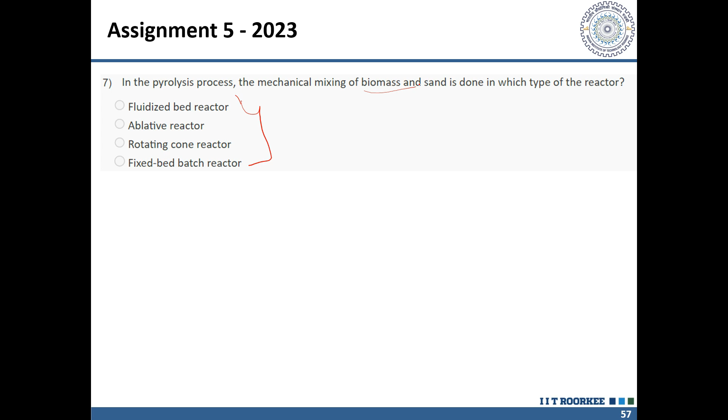So now let's move on to the seventh question. In the pyrolysis process, the mechanical mixing of biomass and sand is done in which type of reactor? There are four different types of reactor here: fluidized bed, ablative reactor, rotating cone reactor, and fixed bed batch reactor. So which one uses the mixing of biomass with sand? The answer for this is rotating cone reactor. But before going to the answer, what are these four types of reactors? What is the difference between them?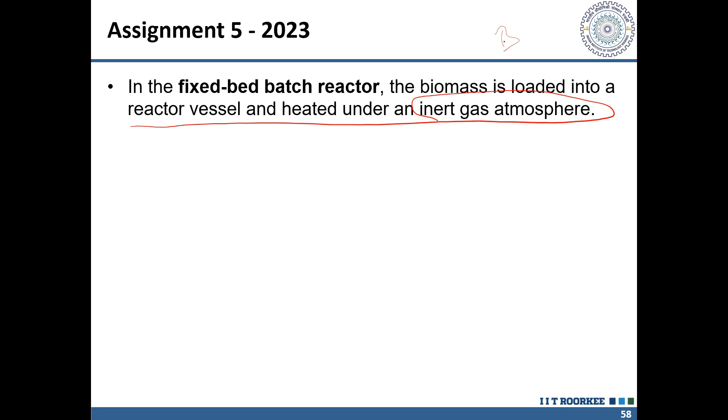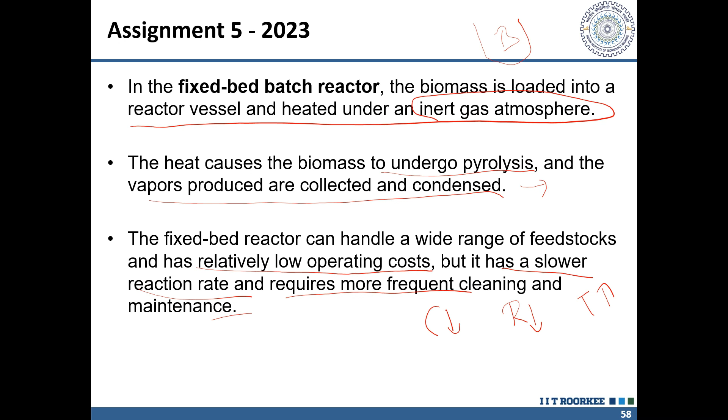In the fixed bed batch reactor, biomass is loaded into a reactor vessel and heated under an inert gas atmosphere. So we just load the vessel with the biomass under inert gas, and the heat causes the biomass to undergo pyrolysis, and the vapors produced are collected and condensed. The fixed bed reactor can handle a wide range of feedstock and has relatively low operating cost, but has a slower reaction rate and requires more frequent cleaning and maintenance. So the cost is very low, but the reaction rate is also low, and it will take a higher amount of time. So this is the advantage and disadvantage of the fixed bed batch reactor.

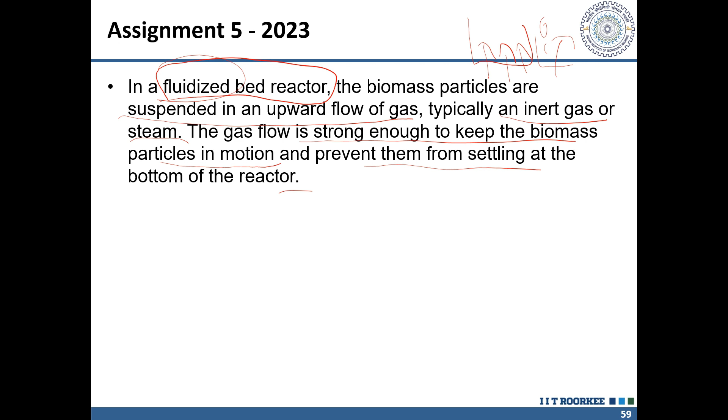And what is a fluidized bed reactor? In this, the biomass particles are suspended in an upward flow of gas, typically an inert gas or steam. The gas flow is strong enough to keep the biomass particles in motion and prevent them from settling. So the air is passed from the bottom, and the speed is set so that the biomass will never settle down. That's why it's known as fluidized. The air will keep the particles of biomass suspended.

And this mixing is achieved by the fluidizing gas and does not require additional mechanical mixing. The fluidized bed reactor is particularly suitable for processing small and irregularly shaped biomass particles such as wood chips and sawdust, due to its efficient mixing and heat transfer properties. So this high gas flow rate is responsible for very efficient mixing. Therefore, irregularly shaped biomasses can be used in a fluidized bed reactor.

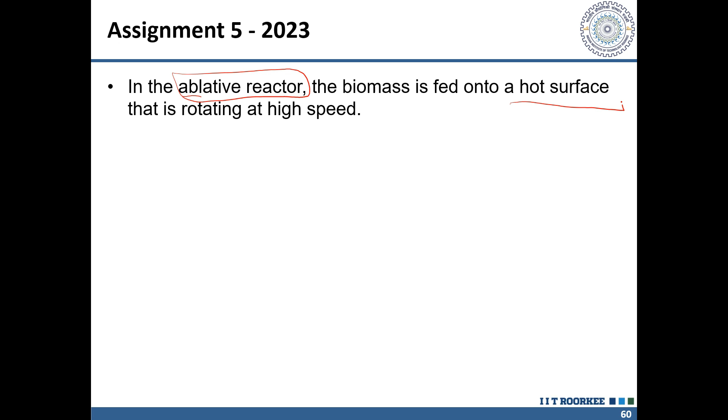And in the ablative reactor, the biomass is fed onto a hot surface that is rotating at a very high speed. In this, there is no air. In fixed bed and fluidized bed, we were using some kind of inert gases or very high flow rate of air or gases. But in ablative reactor, we are using a hot surface which is rotating at a very high speed. The heat generated by the hot surface causes the biomass to undergo pyrolysis, and the vapors produced are collected and condensed. The ablation process helps to break down the biomass quickly and efficiently, but it requires very high energy input and can also result in the production of char.

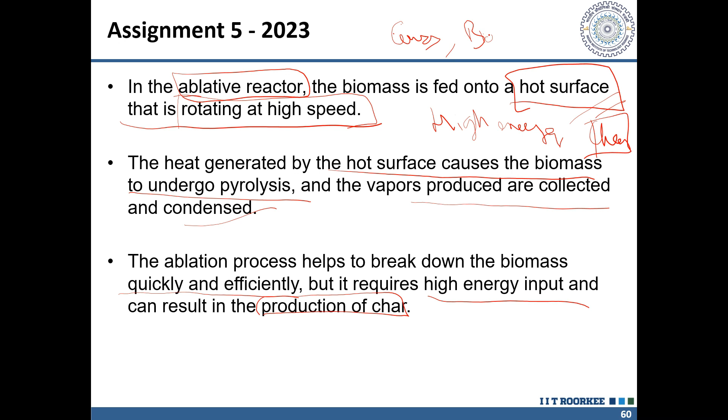So we are using a very hot surface, which is rotating at a very high speed. This causes the requirement of high energy in the process. So the main disadvantage of ablative reactor is high requirement of energy, and also it produces high amount of char, which is undesirable because we need either fuel gases, or we need bio oils out of the pyrolysis reaction.

But in a rotating cone reactor, it uses mechanical mixing of biomass and hot sand to facilitate the heat transfer and pyrolysis reaction. So in this, sand is used, so the sand will be heated. It will be a heated sand, and this sand will be in contact with the biomass. This type of process leads to very good heat transfer. So the heat transfer done by sand to the biomass is very good, and that's why it produces a high yield process.

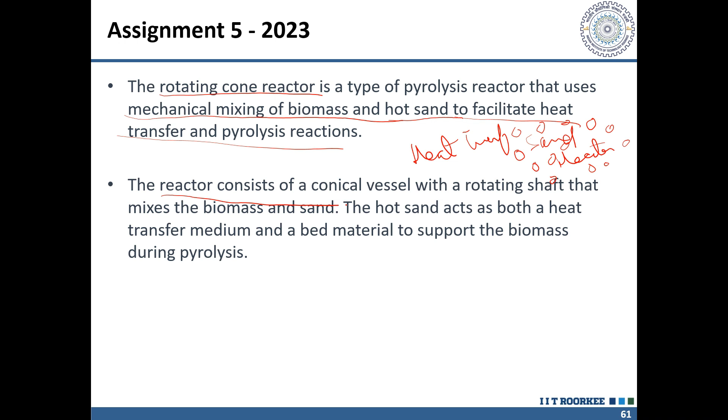So the reactor consists of a conical vessel with a rotating shaft that mixes the biomass with sand. The hot sand acts as both a heat transfer medium and a bed material to support the biomass during the process. And this rotating motion also helps evenly distribute the heat and facilitate the contact between biomass and hot sand, leading to more efficient pyrolysis. The rotating cone reactor has been shown to have high conversion rate and high yield quality of bio-oils.

So rotating cone reactor uses a rotation plus sand which is already hot. And this hot sand is used for high heat transfer rates. That's why it results in high yield of bio oils.

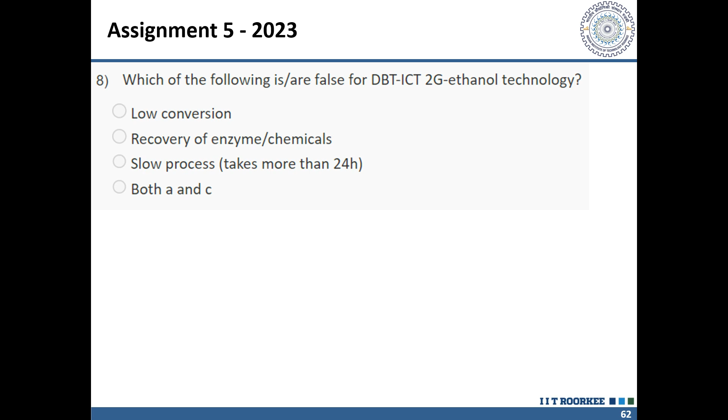Next question is, which of the following is false for DBT ICT 2G ethanol technology? So first of all, what is DBT ICT 2G? This is a method which our country India has made. This is a process used to make ethanol. I will explain this process in the next slide. So first of all, the answer for this is that low conversion and slow process are not disadvantages. These are wrong. Therefore, A and C both are false. DBT ICT 2G is a very high conversion process. It has a very high yield, and it requires very less time for the reaction.

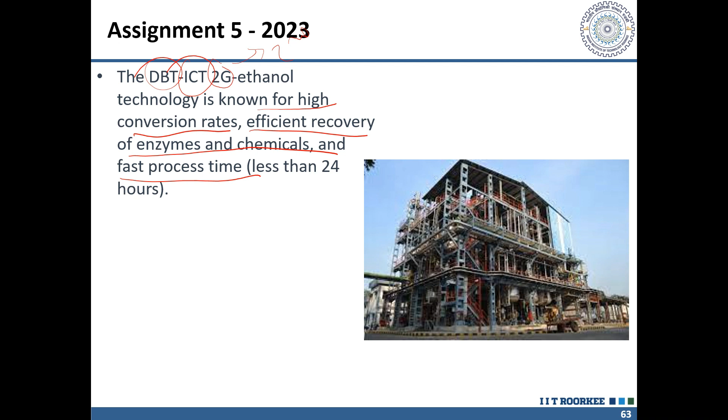But what is this DBT ICT 2G technology? So this technology was developed by the Department of Biotechnology and the Institute of Chemical Technology, and 2G shows the second generation, that it was a second generation type of ethanol which they produce, and this process is known for high conversion rates and efficient recovery of enzymes and chemicals, and it also is a very fast process. This technology was first done in Uttarakhand inside IGL, Indian Glycol Limited. They used this DBT ICT 2G ethanol procedure to produce ethanol. Therefore, A and C are false because it has a very fast process time, and it has high conversion rates.

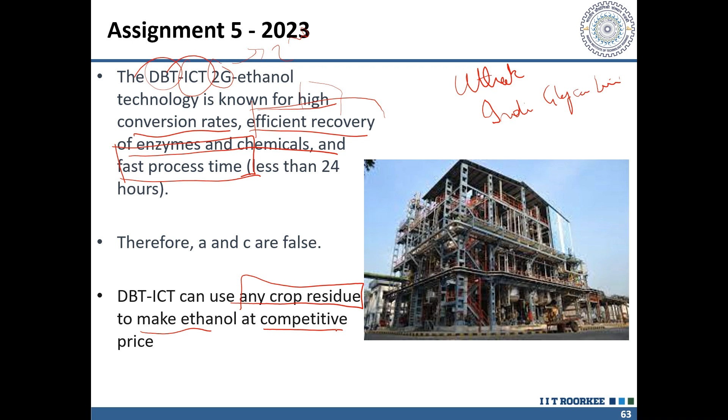And the main advantage of DBT ICT is that it can use any type of crop residue. There is no requirement of sizes or variety of crops. It can use any type of crop residue to make ethanol at a very competitive price. So it is a technology which was developed by Department of Biotechnology and Institute of Chemical Technology in India. And this is by far the best technology to produce ethanol from waste biomasses or mixed biomasses. We can also use any mixed biomasses here.

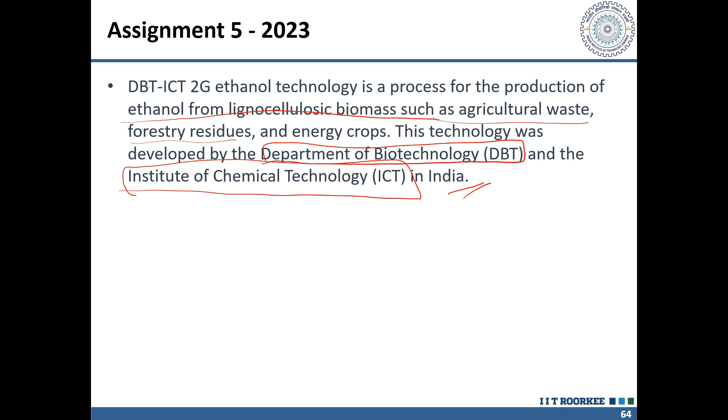And it is a process for the production of ethanol from lignocellulosic biomass such as agriculture waste, forestry residue, and energy crops. In this process, biomass is first pre-treated to remove lignin. We know that biomass is made up of cellulose, hemicellulose, and lignin. So in this, first the lignin is removed so that the accessibility of cellulose and hemicellulose for enzymes is higher. When we have removed the lignin, it is known as pre-treated biomass.

It is then hydrolyzed using mixtures of enzymes to convert the cellulose and hemicellulose into simple sugars. And this resulting sugar solution is then fermented using a specialized yeast strain to produce ethanol. So it seems very simple, but the main aim was to recover all the types of chemicals from it also. This process also uses recovery of chemicals so that the process is very efficient.

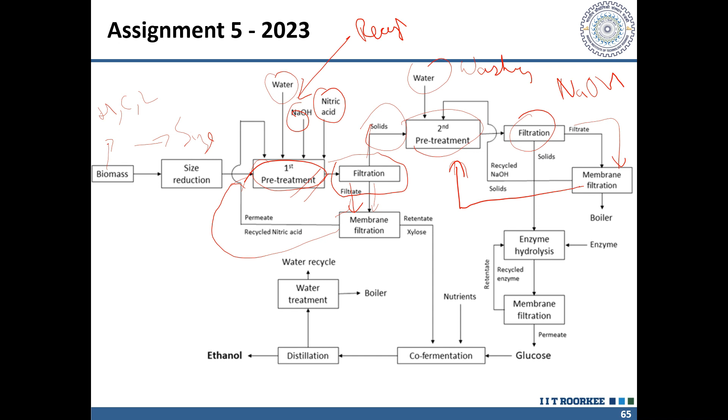After the second pre-treatment, we get what is known as sugar. So these sugars are then sent for enzyme hydrolysis, and there are very different combinations of enzymes. This process uses a very wide variety of enzymes and mixtures of enzymes to do the hydrolysis, so that the process is optimized very much. And after this hydrolysis, it goes again for the filtration, so that we can again get the enzyme, and this enzyme is again recycled back for this process.

So in this way, we get a glucose component, which is then fermented and then sent for distillation, so that we can get ethanol. But in every process, we are using water, NaOH, nitric acid, enzyme, or again water. We utilize all the waste chemicals again. So this is a very optimized process, and it also uses a very less amount of chemicals, and it can also take a wide variety of lignocellulosic biomasses. So this was a technology developed by India and is now being commercialized in various forms.

So let's move on to the ninth question. Which of the following can be identified as pre-consumer and post-consumer food waste? So we have seen from the previous questions also what are pre-consumer and post-consumer. So pre-consumer are some agricultural waste. We can call them commercial waste, and post-consumer can be waste from cafeterias, which we have already used. That's why it is called post-consumer, and these are pre-consumer.

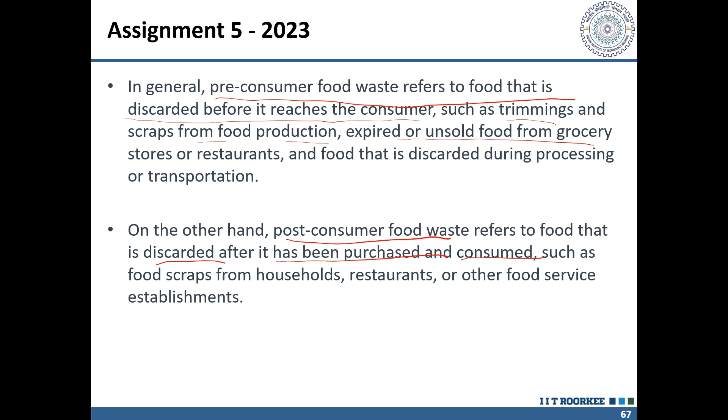So, in general, pre-consumer food waste refers to food that is discarded before it reaches the consumer, such as trimmings, scraps from food production, expired or unsold groceries. And on the other hand, post-consumer food waste refers to food that is discarded after it has been purchased and consumed, such as food scraps from households, restaurants, or other food service establishments.

And now the last question of assignment 2023. The reactor employed in BTG fast pyrolysis is. So there's a process of BTG fast pyrolysis. What type of reactor is used? So in this process, a rotating cone reactor is used.

BTG's fast pyrolysis process is based on the rotating cone reactor, and in this BTG fast pyrolysis method, the reactor was originally developed by the University of Twente, which is in the Netherlands, and BTG has since acquired the technology and improved it. So this reactor was developed by the University of Twente, Netherlands, but then BTG acquired this technology and improved it. So it is a type of rotating cone reactor.

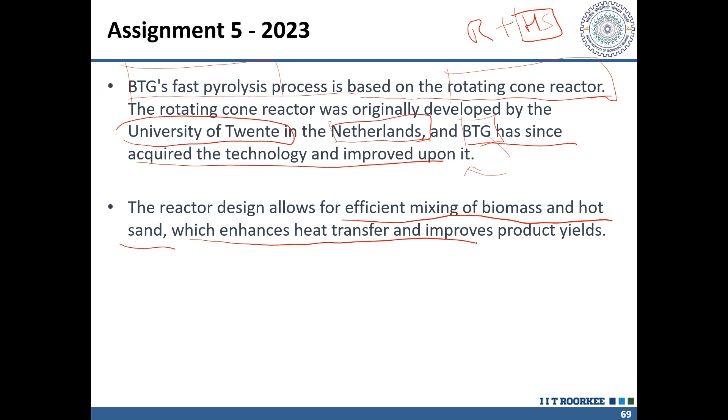So we have also seen what a rotating cone reactor is. It is nothing but a reactor in which rotation occurs in the presence of heated sand. So this heated sand is in contact with the biomass to transfer heat to the biomass in a very highly efficient manner. So this reactor design allows for efficient mixing of biomass and hot sand, which enhances the heat transfer and improves product yield.